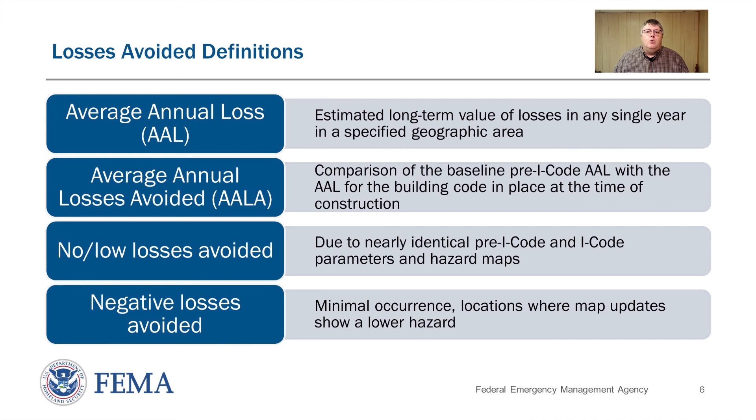Okay, so building code methodology. How do we go about actually conducting the Building Codes SAVE study? So building on past experience from pilot studies and regional studies, we found out that our main data needs were information about assets or structures, code adoption histories, and then the actual hazard mapping itself.

So our first step in the effort is really data collection, getting information that provides a way to be able to assign at a structure level both hazard severities over different return periods, and also code adoption history to know that a given structure built on a certain date can be expected to have been built to a certain code edition. That information is then used to assign fragility or damage curves to structures. All of that info is then put within Hazus or a Hazus-like framework to model losses.

And remember, because it's a losses avoided study for Building Codes SAVE, we compare a pre-code condition with a post-code or after-code adoption. Those are our comparisons. So we get those results out of Hazus, we do comparisons, and then we look at it from a quality standpoint to say, did the results come out the way we expected on both the scale and on a geographic basis? Make sure that we have quality results from our methodology. So those are the main steps in the methodology.

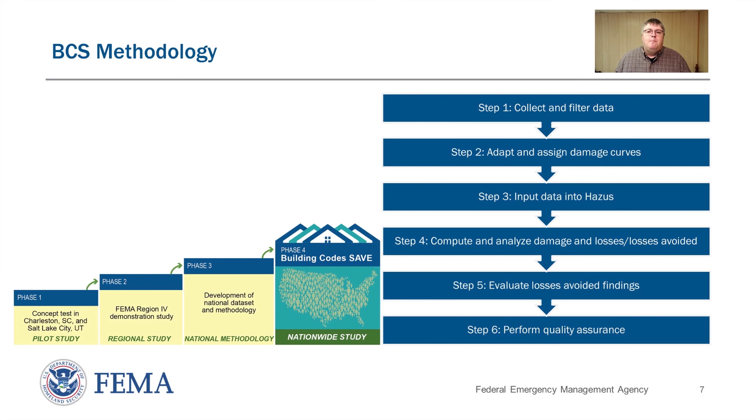Losses avoided computations. So how do we go through the process of actually doing the math to make this work? We do simulations of a pre-code condition and a post-code or with code condition, and we compare the losses for both of those. For flooding, the main comparison is with having freeboard for the with code condition and not having freeboard or being built to the standard BFE or 100-year floodplain flood elevation. So those are the comparisons for those.

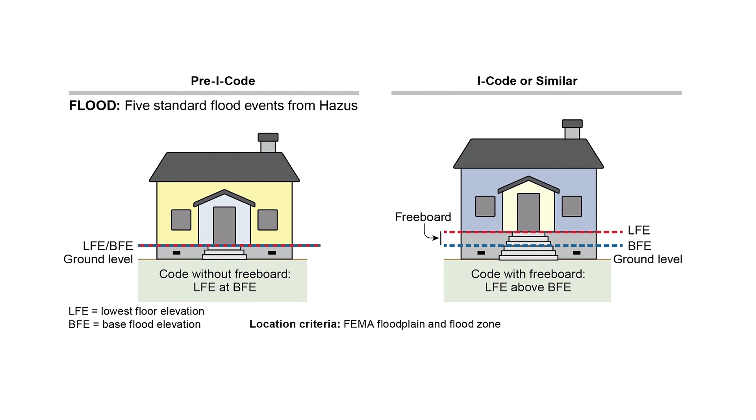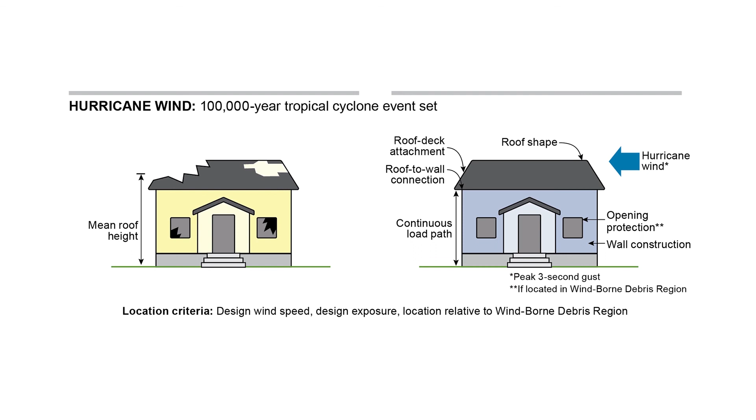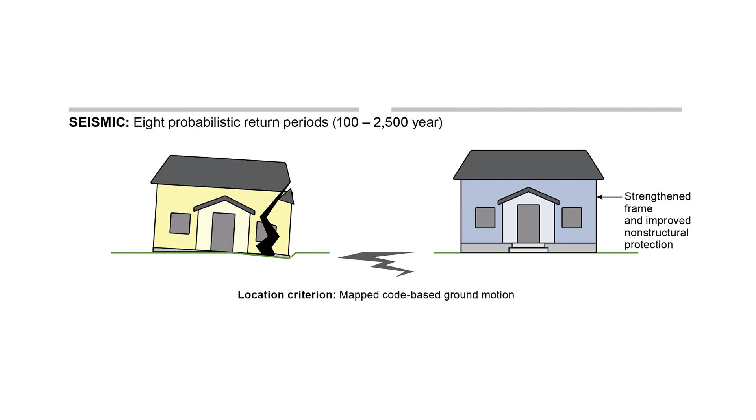For hurricane wind, the difference is really comparing a with code that has practices such as shutters and strengthened roof connections with a pre-code that would be more of a standard building type without those considerations. And for seismic, the with code would be, again, structural design and measures in place to withstand seismic forces versus a more standard design of a structure that wouldn't have that additional strengthening. So in the comparison of the two scenarios, the idea is that when we model that and we have our fragility curves that represent each of these, we should be seeing that adding these strengthenings will end up giving us less damages.

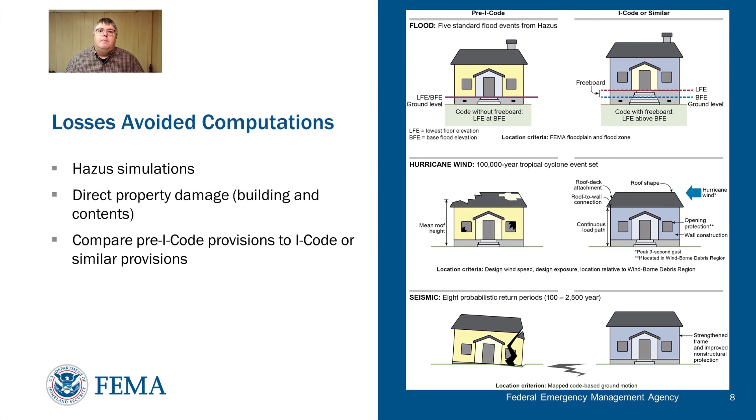So let's talk a little bit about data collection. Our three main data sets that we needed for this study were asset data, code adoption data, and hazard data. Our main source for asset data was CoreLogic national parcel data that was also supplemented with Microsoft Bing footprints, allowing us to have a near nationwide coverage of structures around the US.

For code adoption, we used a combination of national data sources from ICC, also some of the rating services such as BCEGS, and then for certain hazards, also getting local adoption data through some hazard-specific data sets. So for instance, we'll talk about for flood, the use of the Community Rating System database as well for that. For hazard data, we really look to the common sources for this information.

For flood, that comes from FEMA, both from their NFHL, National Flood Hazard Layer, and then also some supplemental data in areas where all the data isn't digital at this point. For hurricane wind, those come from the ASCE design wind data along with NOAA past histories. And then for seismic, the standard USGS seismic data for the US.

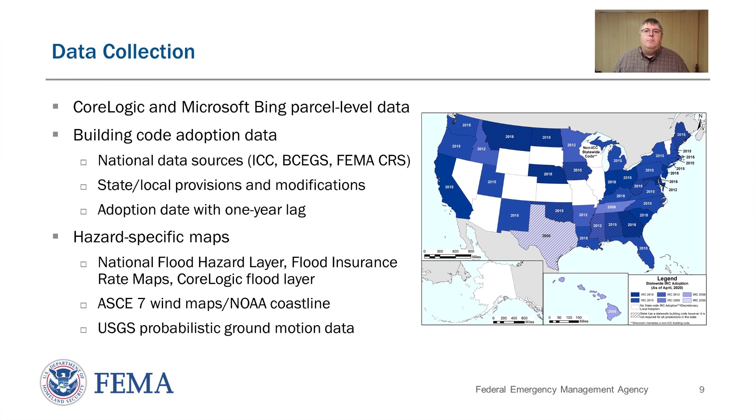So all those are combined and used to attribute the individual structure data to allow us to then do the hazard specific modeling later on. So how do we do data processing? How did we go from our source data down to usable data sets for each of our three hazards? So we started with the National CoreLogic data set of 147 million parcels.

That data set was then first filtered to make sure we only had parcels that had construction on them. The attribute data of that information was then used to figure out, did we have the proper background info to know things about when a structure was constructed, the different roof types, the other information needed to do the hazard specific analysis.

As we boiled that data down, we also had a step where we used the Bing building footprints along with the parcel data to make sure that we had defendable individual building data records. In some cases, things like apartments and condos, you might have multiple parcels but one building. And in other cases, you may have a parcel that actually has several buildings on it, and you would have to make sure that your parcel records correctly attribute each structure for what it's trying to represent.

So there was a lot of data compilation needed to get to the final set of data, which for this study, we were looking at the year 2000 construction and later, and we ended up having a little over 18 million structures in this nationwide data set. If you look at the report, you can see some areas where there might have been a few gaps in the data, but we feel like this is a pretty good representation of post-2000 construction.

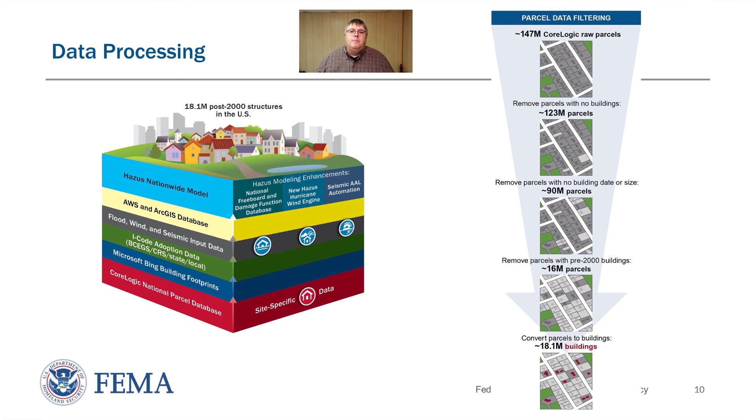So now let's talk a little bit about the flood analysis. Three main components of the flood analysis were assigning to each structure whether or not they had freeboard from a freeboard database that we developed, also assigning to each structure the flood profile, the ranges of flood elevations that particular building would expect for different return periods or recurrence intervals.

And then finally, the assignment of depth damage functions related to the fragility of the building based on, let's say, its foundation type, number of stories, its expected damage levels based on building characteristics. So once we were able to assign those to each structure, we could then run within HAZUS, using that modeling framework, comparisons of with and without code in order to get losses avoided associated with freeboard adoption.

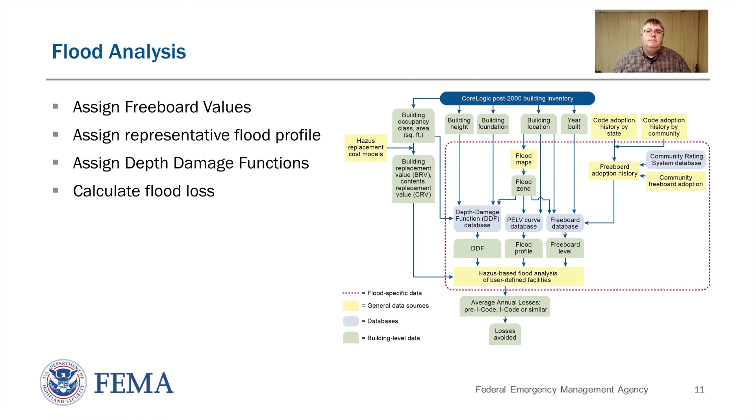So how do we develop our freeboard adoption database? Our primary sources first came from national and state adoption records on different code editions, looking at over time how each state, because flood hazards are in all states, either adopted statewide mandatory adoption of codes or decided to leave it up to jurisdictions.

We also supplemented this information with other flood-specific databases, particularly the Community Rating System database, where communities that are part of that system are scored on various floodplain management criteria, one of which is freeboard, and it actually has a specific score that relates to not just presence of freeboard, but the actual freeboard levels.

So we were able to use that information to supplement some of the national data sources so that we had an idea, from the year 2000 up through the end of the study timeframe of 2018, for each year and each state and each community, of when freeboard was adopted in those communities.

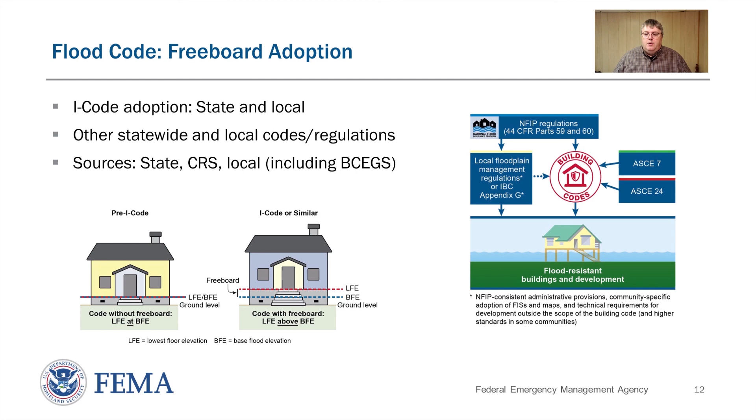So what did we find out about freeboard adoption nationwide? If we took the country, we could split it into three groups. The first group, which we titled the innovators, were those states that had statewide mandatory freeboard adoption prior to or up to the year 2000. So even when the code series first started, there were states within the U.S. that already had mandatory freeboard in all NFIP participating communities.

The next group we found is what we called emergent states. Those are ones that adopted mandatory state required freeboard after 2000 through 2018, the end of our study. In some cases, it was done similar to the innovator states, where there was a statewide requirement. In other cases, as the IRC and IBC required more and more freeboard, up to the 2015 editions where it was required for all structures in the floodplain, many states, through their adoption of the ICC codes, had mandatory freeboard adopted as part of it.

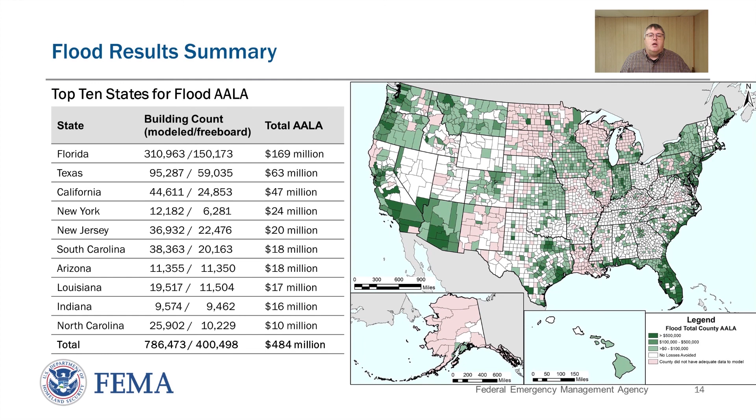For the hurricane portion of the study, an enhanced version of the HAZUS hurricane methodology was developed. First, we extended the methodology to estimate losses for individual buildings, instead of just computing aggregate losses at the census tract or census block level. Next, we extended the methodology to infer key building design parameters, such as the presence or absence of shutters or hurricane straps, based on the year of construction and the local building code history. Finally, we developed a large library of new loss modification functions to explicitly account for several modern building code requirements that were not directly considered in the original HAZUS hurricane methodology.

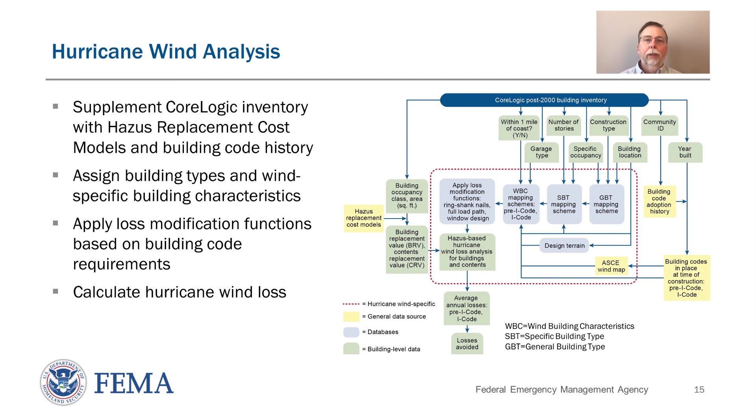Going forward, the results of the analysis show that the adoption of more modern building codes since the year 2000 will reduce expected hurricane losses by an average of $1.1 billion per year. Note that this figure only includes direct losses to buildings and their contents, and it will only increase as more new buildings are constructed and as more jurisdictions adopt and enforce modern building codes.

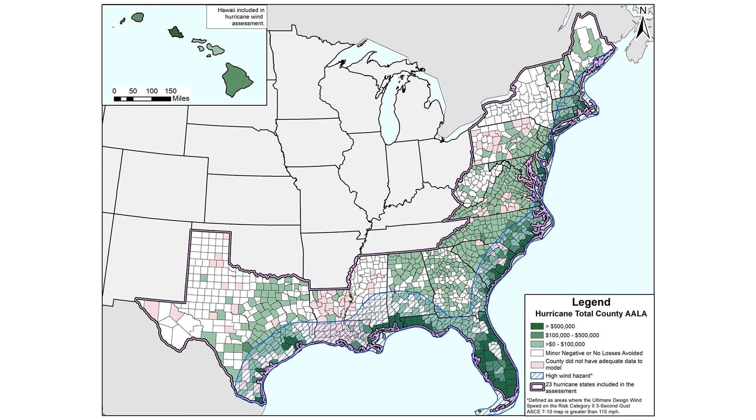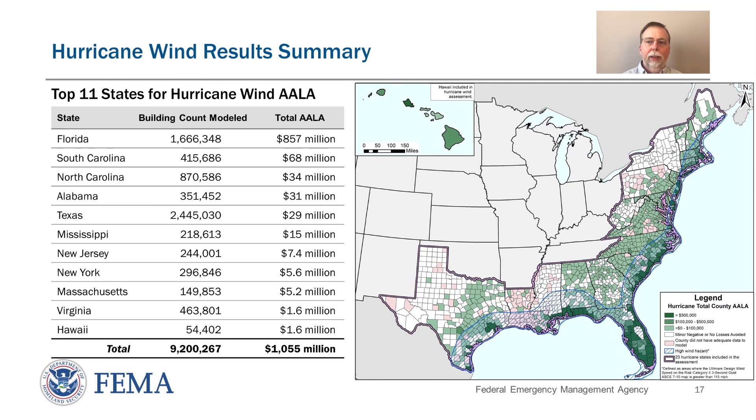Despite contributing just 18% of the post-2000 buildings in the hurricane wind hazard area, Florida accounts for 81% of the national hurricane wind losses avoided due to its high hurricane risk, rapid growth, and early statewide adoption of modern wind design requirements. Because Florida is a big driver of the total AALA, there is further analysis of its contribution in section 5.4.1 of the report. Texas has relatively low AALA because it doesn't have statewide code adoption, and a large fraction of its post-2000 construction was inland. South Carolina is the opposite story. It has a relatively high AALA due to its fairly early statewide code adoption and high growth along the coast.

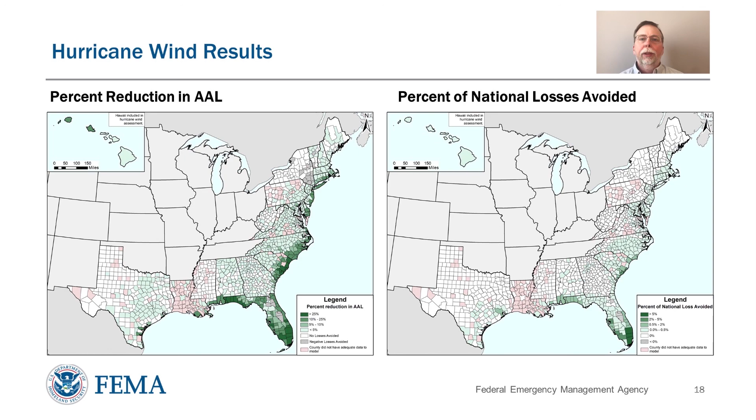These maps illustrate the hurricane wind losses avoided in relative terms. The map on the left shows the reduction in AAL as a percentage of the pre-I-code AAL. The relative losses avoided are greatest in those coastal counties that were the earliest adopters of more modern building codes, including several northeastern counties. The counties shown in the darkest green have already reduced their expected losses by more than 25%.

The map on the right shows the contribution of each county to the national total. This map highlights the very large contribution of the coastal counties in South and Central Florida. However, several coastal counties in the Carolinas, Northwest Florida, Alabama, and Mississippi, and 2 Texas counties, Harris and Galveston, are also significant contributors to the national total.

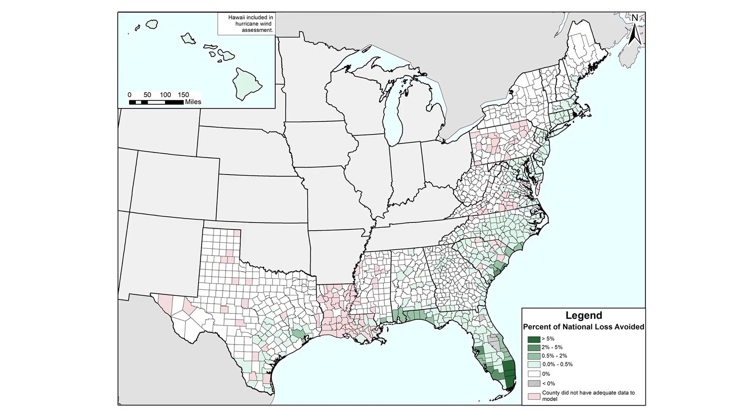This final plot shows how hurricane losses avoided varied by year of construction. Savings from buildings constructed between 2000 and 2007 are mainly due to improvements in wind design criteria and building codes and standards that were developed and adopted in the years following Hurricanes Andrew and Iniki.

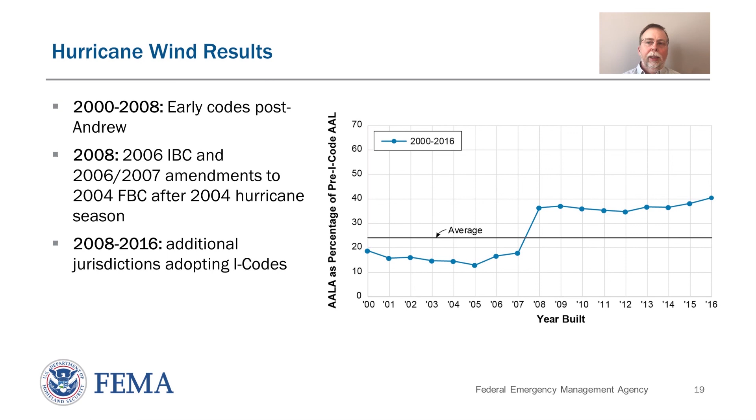In 2008, the savings jump up to about 35% with the introduction of mandatory windborne debris protection requirements and other improvements in the 2006 IBC and in amendments to the Florida Building Code following the hurricanes of 2004 and 2005. After that, the gradual improvement in savings is mainly due to increased I-code adoption. Due to differences in where new buildings were being constructed, we don't always see an increase in savings from year to year.

Thanks, Frank. The approach for the seismic analysis is laid out in this flowchart. The seismic-specific steps are delineated by the dashed red line. The focus of the seismic approach was to combine CoreLogic building data with various models and categorization schemes to assemble a building-specific database for execution of the HAZUS Advanced Engineering Building Module, or AEBM.

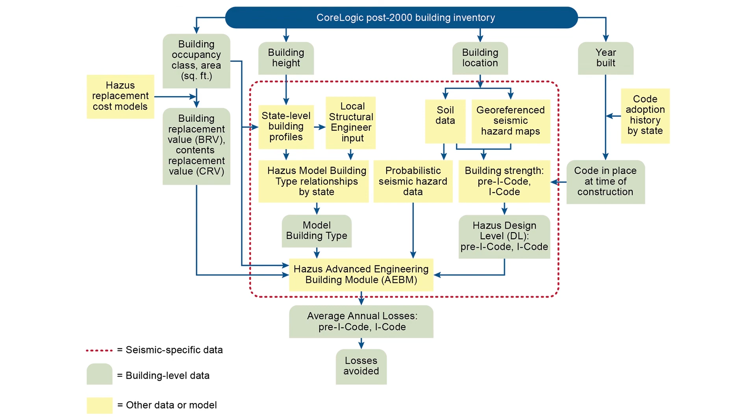The 2 key parameters for each building's analysis are the building's model building type, representing its construction material and lateral force resisting system, and its design level, indicative of its design strength. The execution of these steps resulted in a database that could be analyzed in the HAZUS AEBM to produce estimates of building and content losses under the pre-I-code and I-code conditions, as well as the resulting loss avoided.

In all areas except for several counties in Hawaii and parts of Alaska, the 1997 Uniform Building Code was in place immediately prior to the initial adoption of the I-codes. For the purposes of this study, the 1997 UBC was judged to be similar to the I-codes. As a result, the code assumed to be in place prior to the I-code or equivalent code is the 1994 UBC.

For the 6 seismic states, the total average annual loss avoided for post-2000 construction is approximately $60 million, 8% relative to the pre-I-code losses. Most of the losses avoided occur in California, followed by Washington. Losses avoided in Oregon are small relative to its exposure because many structures in Oregon were assigned the same design level under both the pre-I-code and I-code design. This also occurs in Alaska, where there are fewer buildings, many of which have been built without the benefit of a building code.

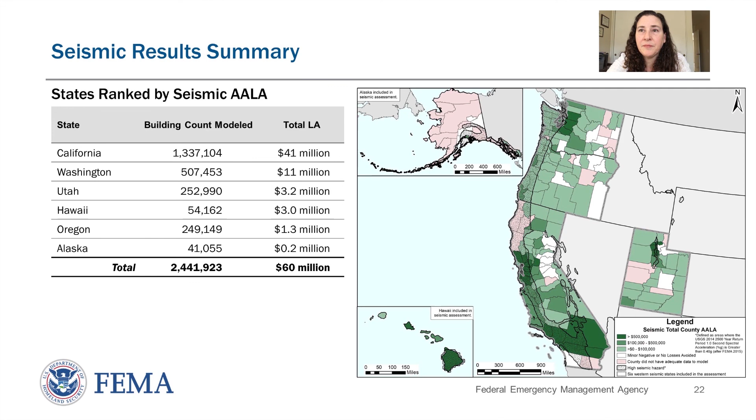Small single-family residential construction in parts of Hawaii often uses a post and pier foundation system, where the first floor is elevated by 2 to 3 feet above grade. This type of construction is more vulnerable to damage than conventional wood-framed buildings on slab foundations. After 2000, code-required improvements to continuous load paths made these structures more resistant to damage.

The performance of this type of building has been studied extensively, and custom HAZUS capacity and fragility curves reflecting the code-required load path improvements have been developed by FEMA. For these post and pier buildings, the losses avoided as a percentage of pre-I-code loss averages 21%, significantly higher than the 8% achieved in the seismic states overall.

These higher relative average annual loss avoided results occur because the pre-I-code condition is highly vulnerable. The results from this unique building type indicate that larger losses avoided would result in the West if seismic codes had not been in place for decades and comparisons were made between no code and current code.

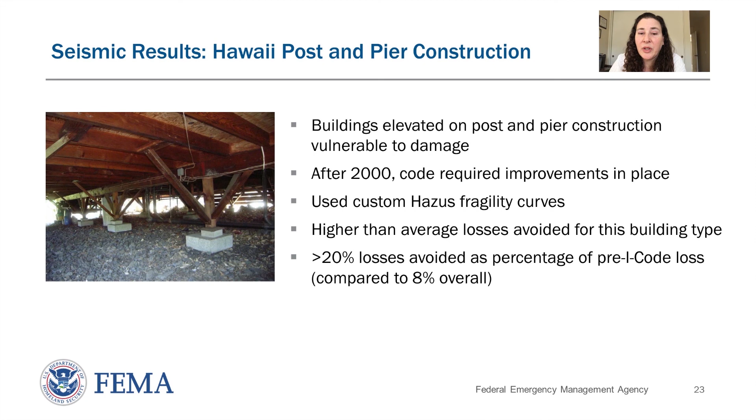And also, the flood, while it is a lesser number, still is a significant amount of losses avoided at $484 million. And that's only those buildings that are in the special flood hazard area. That's where the freeboard, which is contributing to those losses avoided, is occurring.

And seismic, of course, is a much smaller number, given that they have been adopting seismic provisions well before 2000. And so the incremental benefit is smaller, but still significant if you look at how these average annualized numbers aggregate over a period of time. Even the seismic, where we've had 20 years since a big event, is up near $1 billion savings when an event strikes. So one thing to note is that the 4 states of Florida, California, Texas, and South Carolina produce 80% of these total AALAs.

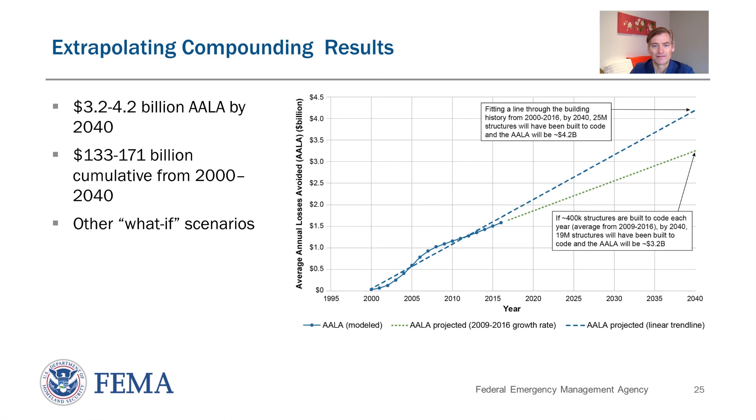And those savings are able to then be reinvested and help them prepare better for the next event. So over a series of events, the community with the codes becomes far better prepared and far more tuned for growth. And that also happens because with homes that are protected, families are able to shelter in place, they're more stable. Schools and community lifelines are able to function better. And so the communities are more stable, the economy is more stable, and that's what drives the growth.

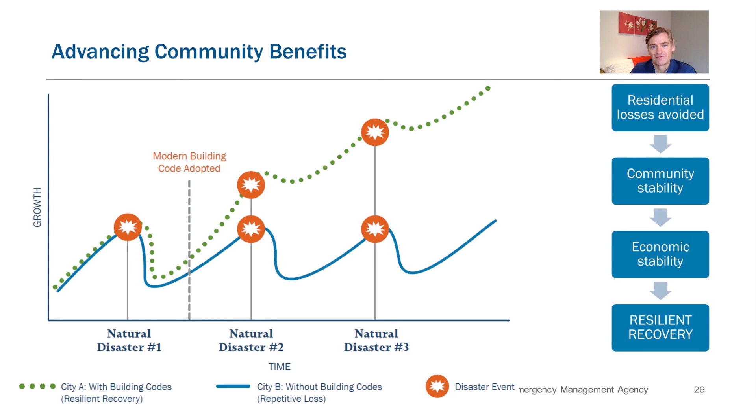And so it all starts with building codes as a catalyst and focusing again on the residential opportunity, which represents a significant sizable growth in capital when you consider time again and the community-wide impacts. And that's really the main message that we're able to draw from this very detailed analysis, that each community can look at their own particular hazards and find their best path forward to growth.

Thank you, Matthew. Now remember the third goal of the study, to incentivize greater code adoption. We realized that a big nationwide technical study doesn't always motivate local change. So we developed a companion brochure to use our results to tell a compelling story for local officials and the public. We know that historic disasters bring real-life motivation. In fact, today's hazard-resistant codes incorporate many lessons learned from past disasters, as we've described. We also know that motivations for local change always tie into local stories somehow.

So the brochure starts by setting the stage for why codes are important in today's environment of increasing hazards and disasters. Then provides regional examples of the effects of disasters on communities. Highlights some communities that have successfully used codes to break the chain of destruction, and provides justification using our study results and a call to action and details on how to achieve greater code adoption in your community.

I want to take a moment to highlight some areas that have successfully used codes to break the chain of destruction. Some states have done this by adopting modern statewide building codes that protect property and people during natural disasters. Florida and California, pioneers in this field, have had modern hazard-resistant building codes in place since the 1990s. Other states such as Virginia, New York, and Montana have followed suit, putting in place statewide building codes that local jurisdictions are required to adopt.